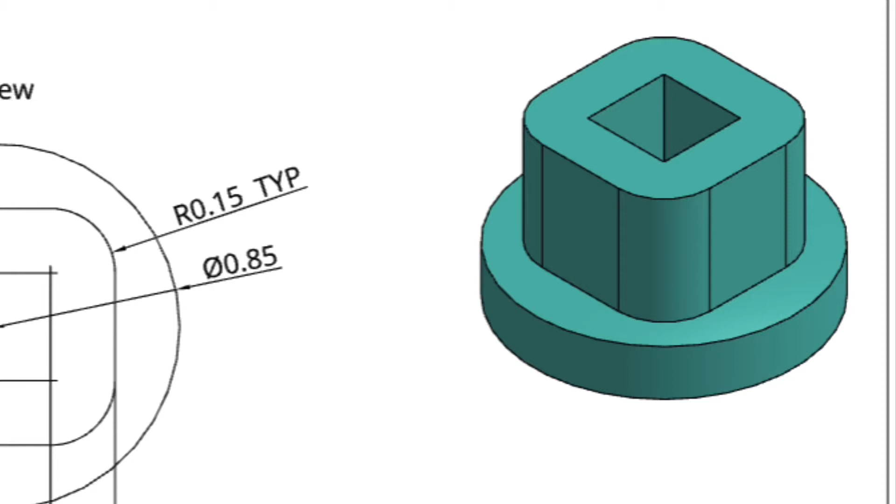To create the piston guide. This is going to be the piece that guides the piston up and down and makes sure it stays in place. The piston guide.

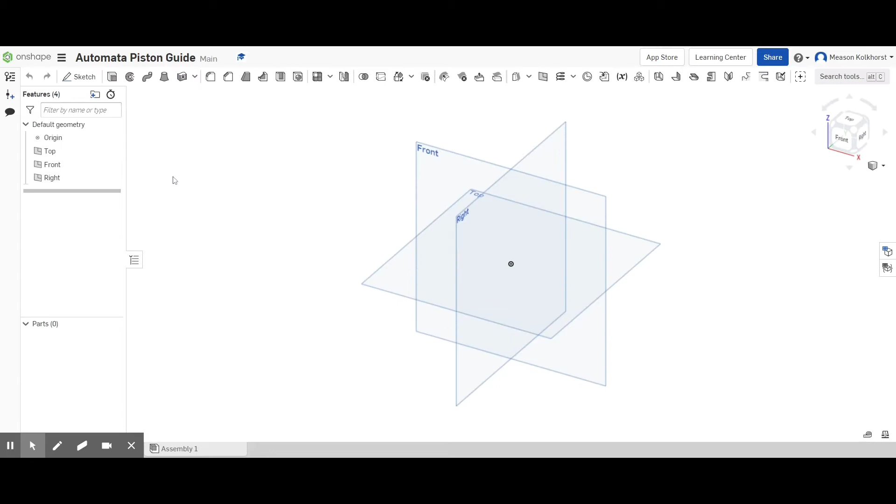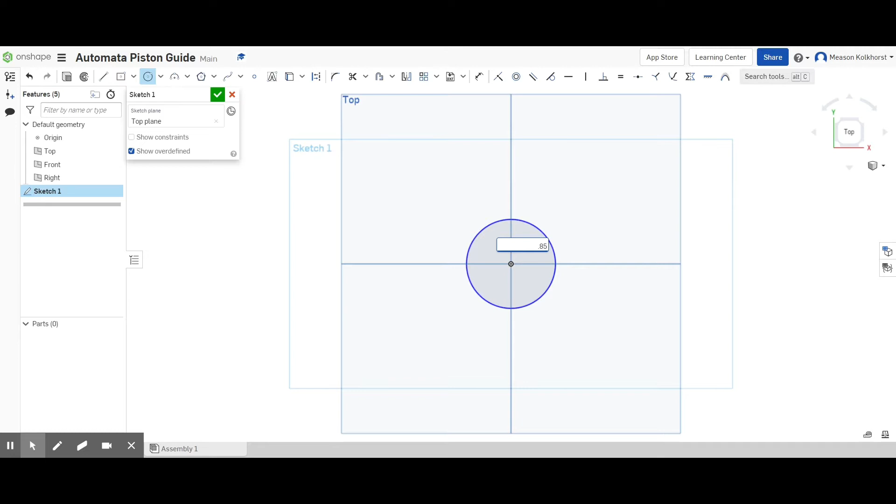Just like the lid, we're going to do this on our top view, our top plane. So I'm going to do a sketch on the top plane. Let me change it to the top view. We're going to start with our circle, and we're going to draw a circle, and this distance is going to be 0.85. 0.85. Let me zoom in on it so I can see what I'm doing here.

Let me turn the circle tool off. I'm going to go grab the center point rectangle. We're going to draw two rectangles in the center here. First one is going to be 0.55. Enter 0.55. And you'll notice that it almost touches the outside here, and that's exactly what we want.

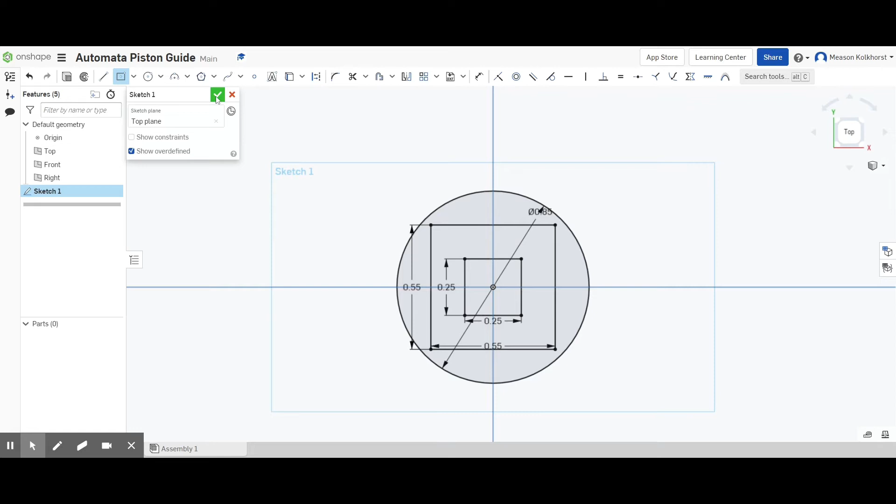Second one is going to be the same diameter as our piston, which is going to be 0.25, enter 0.25, enter. Green check mark. Now I'm going to turn it isometric so I can kind of see what I'm doing. Let me zoom in. We're going to extrude, and this time I want to extrude only this center square. So I don't want anything except for the center square.

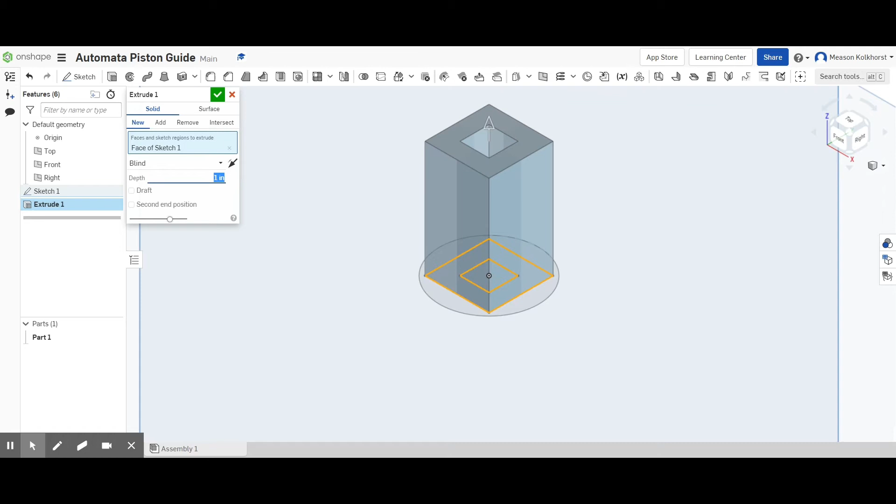And I want this height to be 1/2 inch, 0.5. And I'm going to green check mark. That's looking pretty good. That's exactly what I want. Come back and I'm going to turn on the visibility for my sketch, which is this little eyeball. And now you can see the original sketch is there.

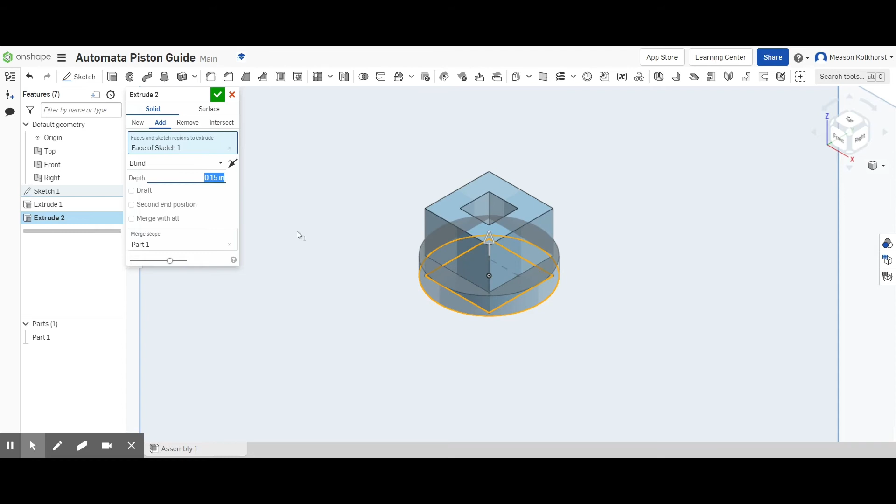We're going to do a second extrusion on this, and we're going to extrude just the outside circle. So I'm going to click on that outside circle. I want that height to be 0.15, 0.15, green check mark. And that's what this guide is supposed to look like.

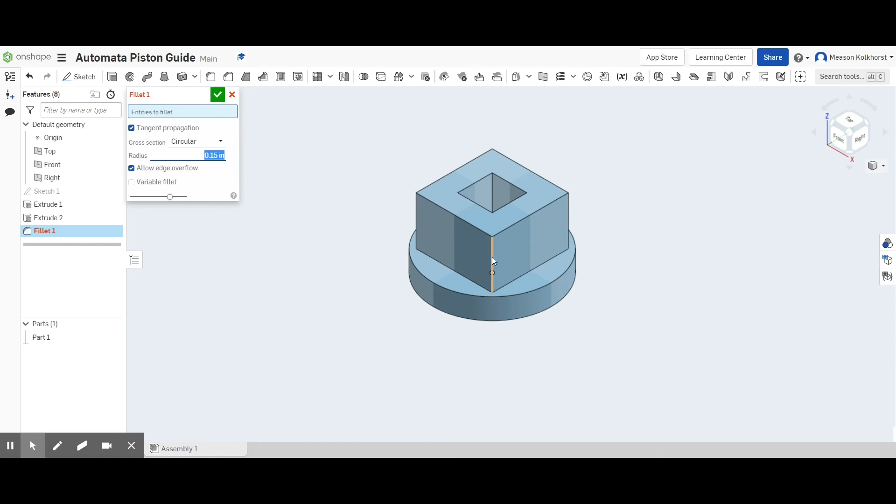So we have one more piece we need to do, but before that I'm going to turn the sketch back off, make it hidden. So I'm going to hide that sketch. I come back and choose my fillet tool, and I want this radius to be, again, 0.15. And I'm going to do all four edges, all four corners of this center square, so it gives it kind of a rounded shape. Green check mark, looking pretty dang good.

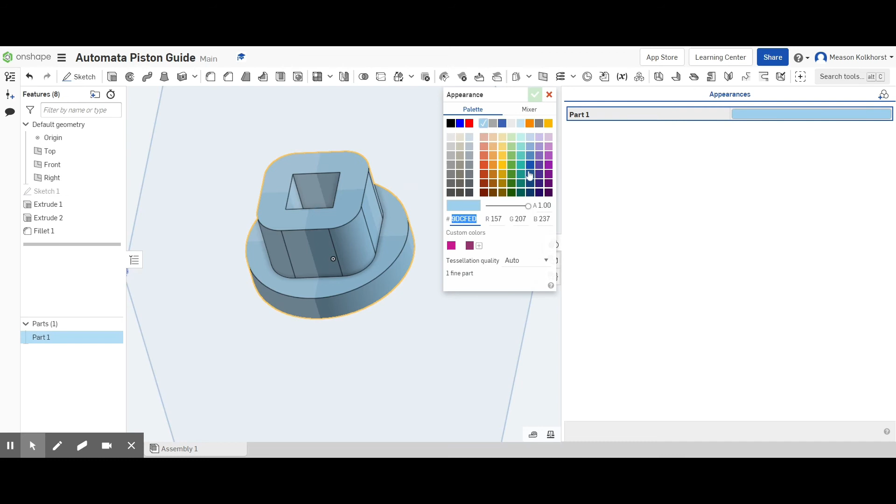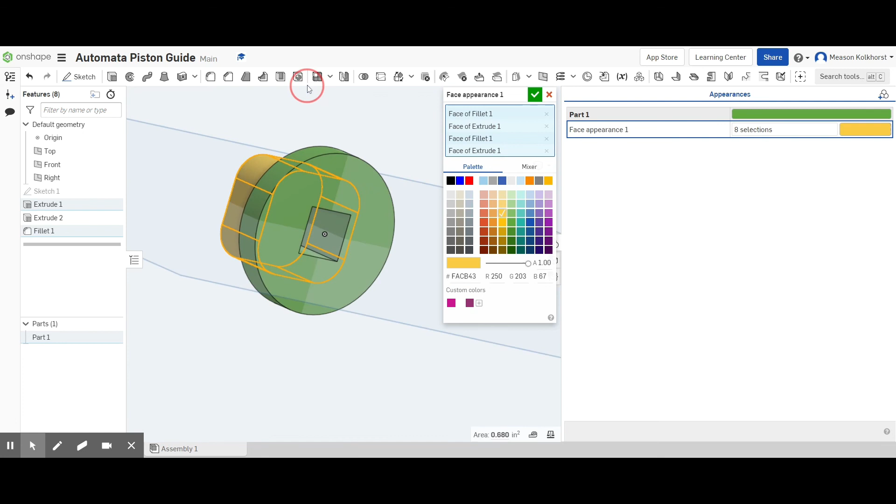I need to put some color on this. Now for me, I want this to blend into my lid, so I'm going to use the same color as my lid. But I want to give it some other colors here. And I'm going to give it a yellow on this middle part here. And that way I know that that's going to be going down and the top part's going to be going up. So green check mark, change it back to isometric.

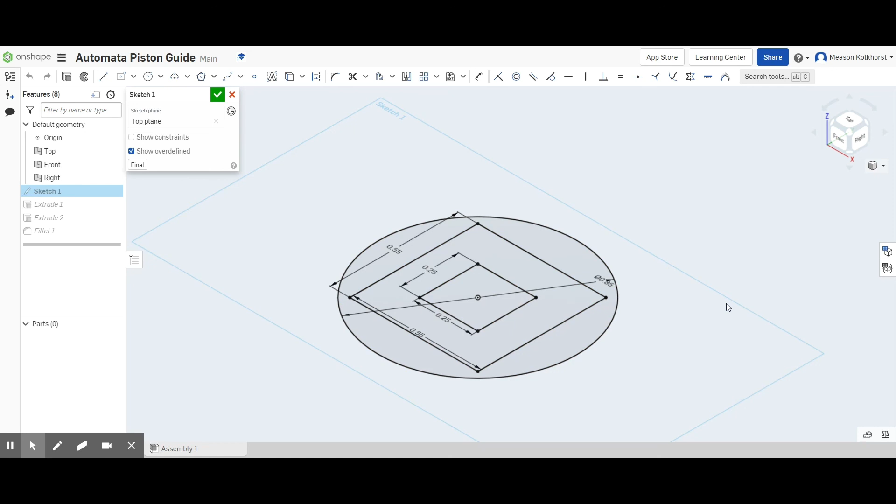You have two pictures you need to turn in for me. The first one is going to be our sketch. So double tap on that sketch, zoom in so I can see the dimensions. Take that screenshot, green check mark. Second screenshot is going to be of the extrusion. Good luck.